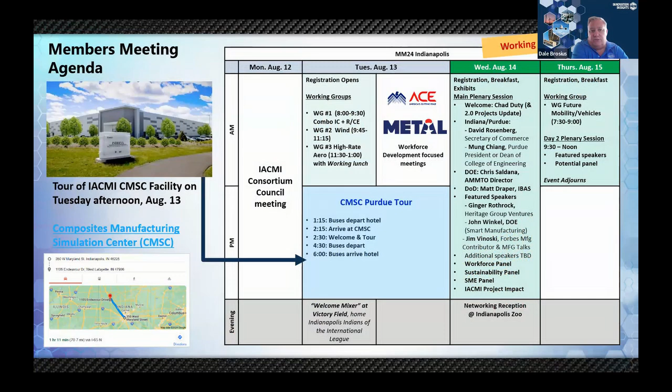It will be here in Indianapolis, where I'm located, and where the U.S. Olympic swimming trials are right now located. Busy days. Main slate happens Tuesday, Wednesday, Thursday. I'll go into a little more detail, but Wednesday, Thursday are the main speakers. Tuesday is working groups, workforce development meetings, and a tour of Purdue, plus a special event.

We'll have the working group meetings all through the morning until 1 p.m. on Tuesday, with one more working group in the Future Mobility and Vehicles Technology early Thursday morning.

The afternoon of Tuesday, we'll load up on buses and go up to Purdue, about a little over an hour away from the meeting site, and see the Composites Manufacturing Simulation Center at Purdue, along with the 3D Experience Dassault Systems Center there. So lots to see in terms of manufacturing equipment, modeling, simulation, and other great innovations.

We'll come back from Purdue, and there will be a welcome mixer at Victory Field, where the Indianapolis Indians play. It's about a block or so away from the hotel. We've got tickets for that for those attending the members meeting, as well as beverages and refreshments on the Corona patio. So you'll have both seats as well as food and drink.

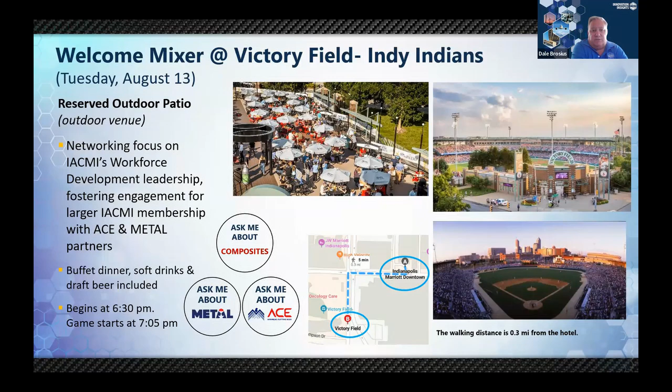On Wednesday night, after the main slate is over, the long day of Wednesday when we have lots of presentations and participation, there's a great networking reception at the Indianapolis Zoo, great pavilion there, plus the opportunity to see some critters. So we look forward to those of you joining us there.

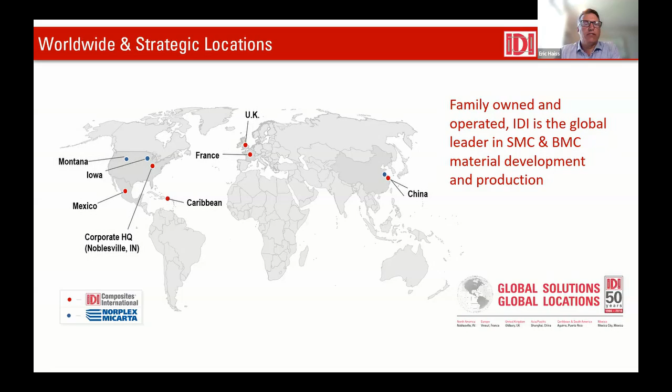I just want to take a couple moments and introduce everyone to IDI Composites. If you're not familiar with us, IDI is a thermoset composite manufacturer. We're privately owned and headquartered in Noblesville, Indiana, where Dale is sitting at today. But we are a global company, so we have locations in Europe, in Asia, and in North America, as well as a sister division, Norplex Micarta, which also operates in the thermoset industry, but in a slightly different set of products. Our core markets—we started in the electrical industry.

IDI—dielectrics is what the D stands for there. So we started in the electrical industry, but we have now diversified into a broad spectrum of different markets, including infrastructure, transportation, and construction. We're pretty well diversified across all four of these, which has been very helpful as we've gone through the last few years in tumultuous times with supply chain, COVID, et cetera. But also as we see different trends, for example electrification happening in the automotive industry, our electrical background has been really beneficial for us to respond to those requests from our customer base.

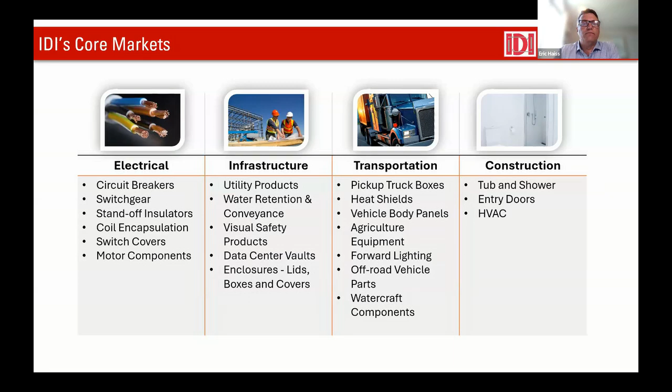Some of you may know, and some of you may actually have visited this facility. So we are currently moving into a brand new facility, just a few miles east of our current facility. Our current facility is in the downtown area of Noblesville, and there were some infrastructure projects the city had planned that essentially forced us to move into a new facility. So we have custom built a 120,000 square foot facility dedicated to SMC and BMC production.

It will roughly double our current capacity of SMC production, and will include 2 new SMC lines, 60-inch width. We will be upgrading one of our existing lines and putting it back into production for a total of 3 production lines. We'll also have a couple of development lines available for new products and co-working with customers.

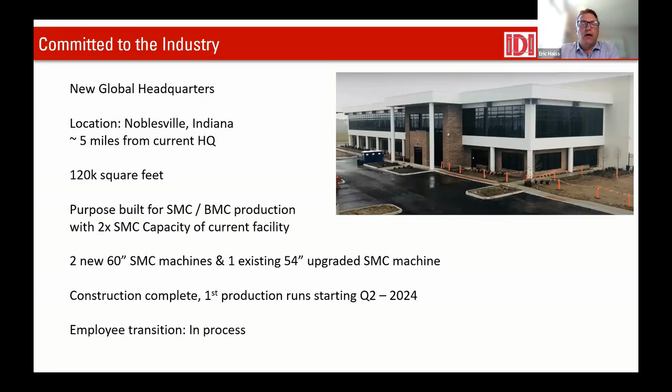So construction is complete. We're actually running early lots of material from the facility now, and our employees are moving from one facility to the new facility currently as well. So really exciting times for us, and just an indication of the commitment that IDI and the Merrill family has to the composites industry.

So we want to start off with this: customers for a long time have known SMC for the performance it provides, its ability to design complex parts, the thermal capability of SMC, toughness of SMC. So there are a lot of features customers like, but in the wake of recent sustainability developments, it's been facing a headwind because of the thermoset nature.

But it's important for us to recognize that SMC has 2 other features that may surprise you. First is that SMC does have a low carbon footprint compared to other materials. And also SMC already has recycled content in most cases, and the product itself can be recycled. So there's good information on both fronts, but today our intent is to talk about the low carbon footprint and how it compares to other materials.

In '22, IDI started to get inquiries from a variety of different OEMs in automotive as well as in the electrical side of our business regarding carbon footprint and sustainability in general. So we started to look at our knowledge base internally and recognized that although we had some history with recycling SMC and BMC products previously, we really didn't have expertise around sustainability, and we needed some outside help. So we launched a multi-phase global project with Forward Engineering, with Adam Halsband here in the Detroit area, as well as his team in Munich, Germany, to better understand sustainability and how that would impact our products, as well as global warming potential of other products.

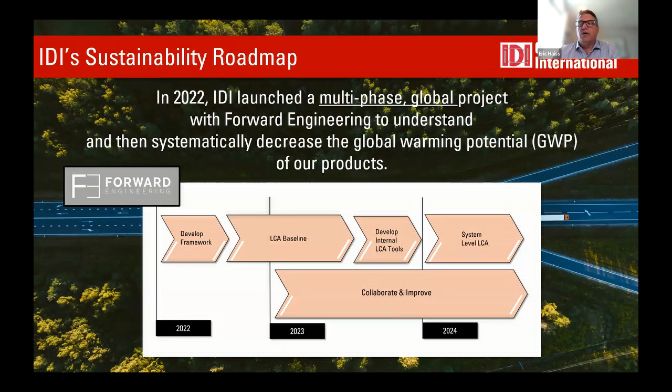So after some introduction and training Forward Engineering did for our team, which was really valuable, they recommended that we do a top-down cradle-to-gate life cycle assessment. So what does that mean? Essentially, we looked at the carbon footprint, or global warming potential, of our SMC materials, as well as BMC materials, but focused initially on SMC, looking at the energy consumed within the facility, as well as all the raw ingredients, et cetera. And we came up with a cradle-to-gate global warming potential for our SMC products.

So cradle-to-gate means that this is the carbon footprint for a kilogram of SMC that is packaged and ready to ship at our dock—so that is the gate, if you will. The cradle means that we include all of the embodied carbon for all of the raw materials that come in, whether it's the fiberglass, the resin, the packaging, the fillers—right from whether it's the mine or the initial oil production needed to make those raw materials.

All of that carbon is included, including the transportation to move it throughout the supply chain into our facility, as well as all of the energy, waste, et cetera, that our facility uses and or generates to create that kilogram of material. So this is an important point.

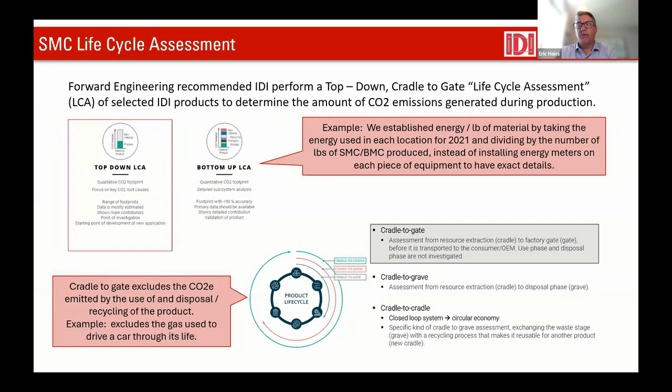You guys still hear me? Dale, can you guys hear me? Yeah, sounds good, Eric, thanks. Kim, can you hear me? Yes, yes, okay, you sound great. Sorry, yeah, I just lost power, but luckily I have a backup power supply, so that's why I got darker. Sorry about that. It's all good. Okay, as long as you guys can hear me, then we'll keep going.

So we have 2.5 kilograms of CO2e, which is equivalent. Not all emissions are carbon dioxide, but we do have a method of basically translating them into carbon dioxide, and so that's what we mean by equivalent.

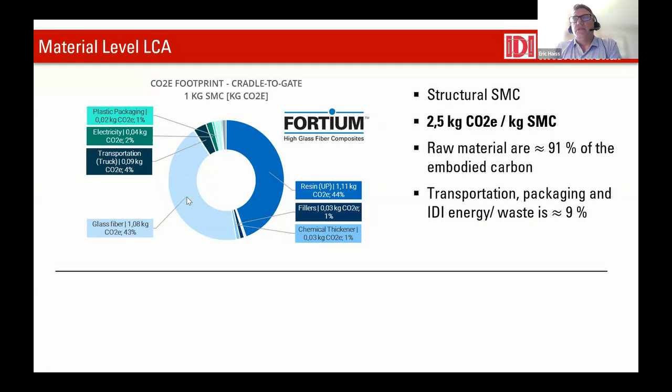So CO2e. What's important here, when you look at this pie chart, it breaks down the sources of that CO2 equivalent global warming potential, and most of that is coming from resin and glass. Very little of it actually comes from the electricity that we use in our facility or the plastic packaging, most of which is recycled as well. So this is an important thing for us to understand as we looked at that and started to plan what our next steps were for improving our products.

We've since done bottom-up LCAs for about almost 30 of our products now, including different BMCs, SMCs, carbon fiber filled products, glass fiber filled products, et cetera. So we have a wide variety of different global warming potential data that allows us to understand how we make those improvements to products going forward.

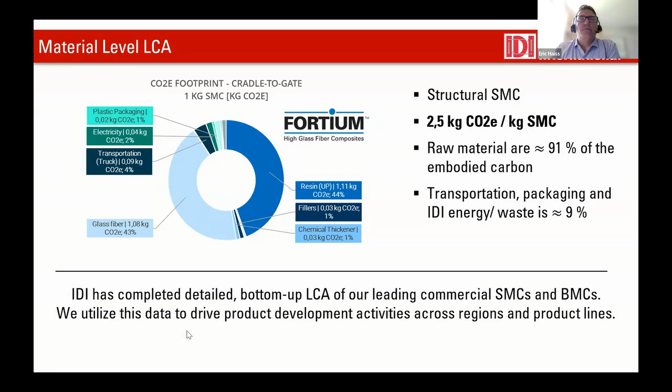Now, the next question you might ask is, well, how does the global warming potential of SMC compare to other materials? Here you have a comparison of some materials that we are often competing against for different applications.

Steel is a little bit lower on a kilogram basis than SMC. Aluminum is quite a bit higher. And then we have thermoplastics - this is a polypropylene product where we've got both an LFT pellet as well as an organosheet. So depending on the product, we compare pretty similar to the thermoplastics.

But this really does not provide the full picture for decision makers. So it's easy data to understand and digest, but what's a little bit more tricky is to understand what happens further on down the supply chain and the product process.

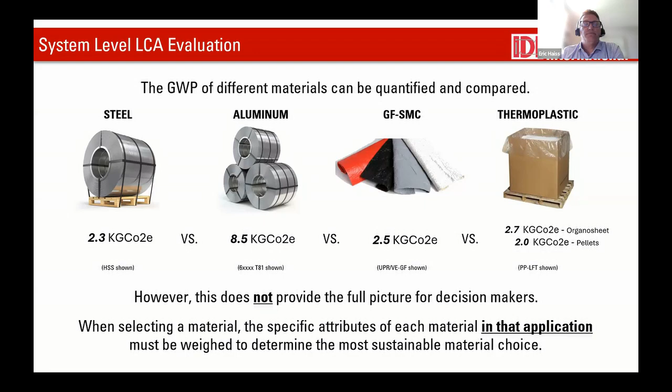So to do that, we have to move from a material level LCA, which we just looked at, to what we call a system level LCA. For a truck bed, for example, this application has a lot of demanding requirements. It's one of the favorite applications for SMC - it works very well in this application, and you can see why here.

That application requires toughness, strength, abrasion resistance, UV stability, and SMC is very well suited for that. But it can be made in other materials as well - steel, aluminum, even thermoplastic could potentially be done, although other than the carbon fiber application that's currently in production, there's not one that is already there.

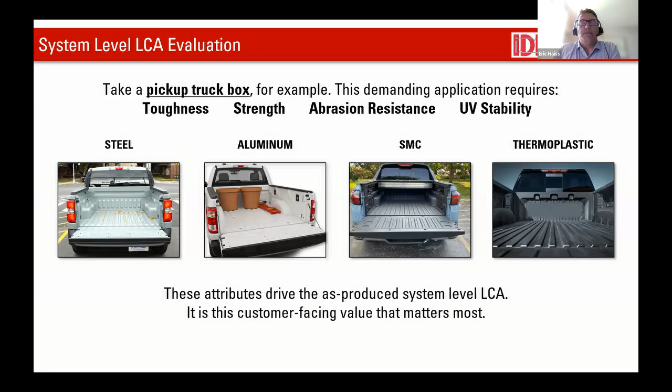So this is what we're trying to understand, is how do these materials compete against each other in an application like that. One of the things that we do is, each material has different densities, also different mechanical performance, and it's important that we consider all of that when we design a complex application like a truck bed. One of the ways we do that is through FEA.

So we, along with Forward Engineering, worked on 4 completely different designs that were focused on each of those materials. We took advantage of the strengths and also tried to design around some of the weaknesses of each of those materials to come up with an efficient production-representative truck bed, so that we could compare the carbon footprint of each of those. To make sure that we were in the right thicknesses and right designs, we used FEA analysis to do that.

Here's an example of one of the tests that we did in FEA, which is a 30 kilogram block that was dropped from a 0.66 meter height, so that we could compare how the impact of that block happened with those beds.

In order to come up with this list of criteria that we used for the design phase of these boxes, Forward Engineering and IDI went to several different large OEMs with a list of criteria that we thought were relevant and asked for their input. So we feel very comfortable that we have a good understanding of the key design elements of a production intent truck bed.

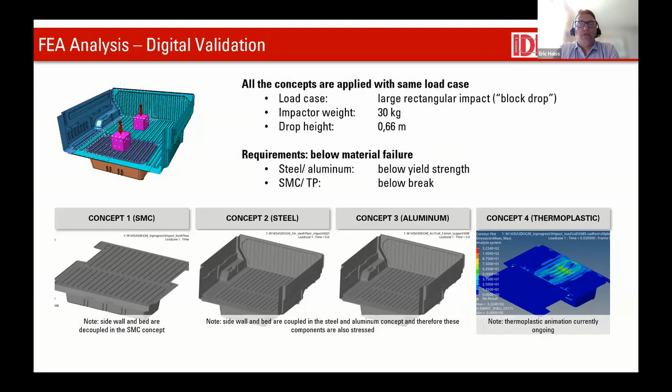So here you can see actually four different designs. The leftmost is SMC. You also have steel, aluminum, and then the thermoplastic design.

Some of the differences you might look at: all of these beds have trunk wells in them. We found that most consumers prefer to have some kind of a bed well there. They like that feature as a cooler or for storage of products, etc. However, in the metals, it's not as easy to integrate that type of feature.

So we looked at ways to minimize the impact on a metallic application or implementation, and you may see that we reduced the size of the opening slightly. Also, you may note that the actual well is made of SMC in both of these cases, because we found that SMC was a more efficient way of making that well than if we had stayed with steel or aluminum in those designs.

You may also see that the panel breakup is different, so the different shades of colors indicate the different panels that were done in the design. For example, here you can see the steel sidewall is all one piece because steel can be drawn relatively deeply without needing additional steps.

Aluminum, on the other hand, struggles with depth of draw, so you have to create the wheel well from a separate piece. You'll see these types of features as well as different wall thicknesses on this page.

Once we had those designs, the next step was for us to go through and create a very detailed bill of material as well as bill of process for each one of those designs.

So these are just some screenshots of some of that, where we're looking right down to the cross members, the fasteners, the seam sealers, the E-coat, spray-on bed liners in the case for the metal applications. We create that list of materials that are needed, as well as the different processes, whether it's stamping or painting, et cetera, that are involved.

Once we had those lists of materials and processes, we went and looked up the appropriate life cycle information for each of those products - it's called a life cycle inventory. We have a full list of not only what those values are, but where we got those values from. We use third-party verified data in every instance, so that we have the latest information in a very comprehensive, detailed study.

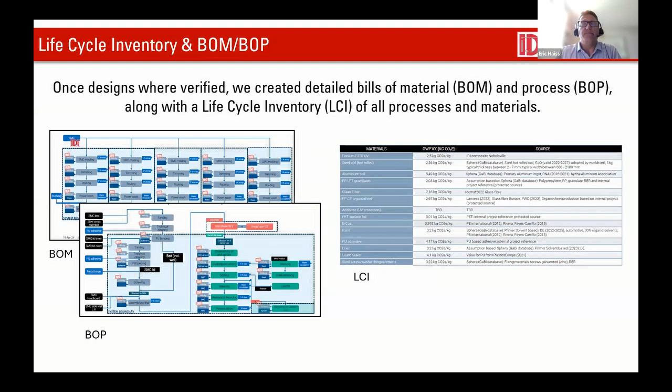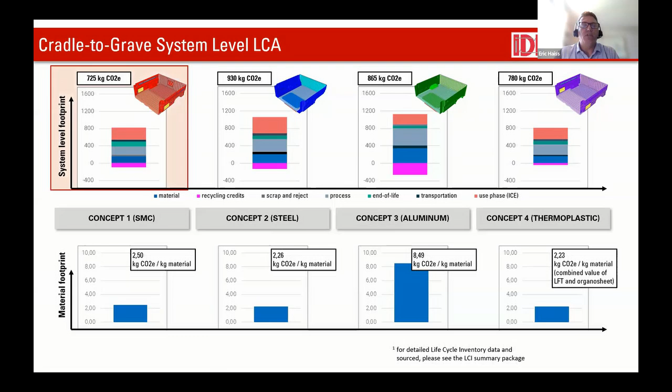Today I also wanted to add some new information. One of the questions we got asked often is how does the transition from internal combustion engines to electric vehicles affect this study?

Here's some results of a sensitivity analysis that Forward Engineering did. We look at the same life cycle, 200,000 kilometers, but using an electric vehicle instead, assuming the standard US grid electrical carbon footprint. This would vary region to region - for example in Europe which might have a lower carbon footprint, or an area like TVA, Tennessee Valley Authority, that has a lot of hydropower. But looking at the average electrical grid in the US, the overall numbers do come down when you look at the carbon footprint, but the ratios more or less stay the same between electric vehicle versus internal combustion engine.

Going to one more slide here, just to talk about next steps. I mentioned briefly that we are meeting with OEMs, setting up those meetings now, and intend to do that in the next month and a half or so to get their direct feedback for the detailed information. Then we plan to publish a peer review paper later this year. We have to get the word out.

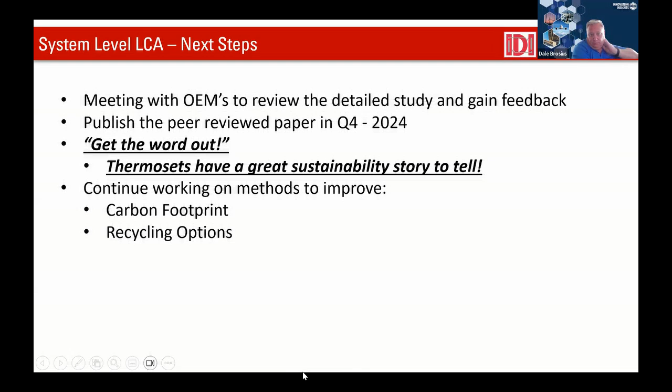Sorry, Dale, I can't hear you. Kim, am I coming through? I can hear you just fine, Dale. Eric, can you hear me? All right, he can't hear me either. I will send him a message in the chat, and we can make sure those questions get to him that way. Maybe his power came back on and he's muted. I'm working on that. Let's try it again - Dale, can you hear me now? Yeah, we can hear you. Can you hear us?

I think we're going to have to move into doing his questions online - I can hear you guys now. Okay, great, sorry about that, guys, maybe your power came back on, whatever happened. So the question was, where do you plan to publish your peer-reviewed paper? Great question - I honestly don't know that answer at this point. I'm working with Forward Engineering on the process to do that. We intend to present at the SAE World Congress in front of a wide variety of material groups there, so that we're very open about the study.

You're probably still not seeing it, right? You need to share the window. It's not showing right now? You need to share the other application, the web browser, or share your screen directly. I thought if I just put it over there, it would pop up. Now you're seeing it? Yeah, okay. Thank you, Brian.

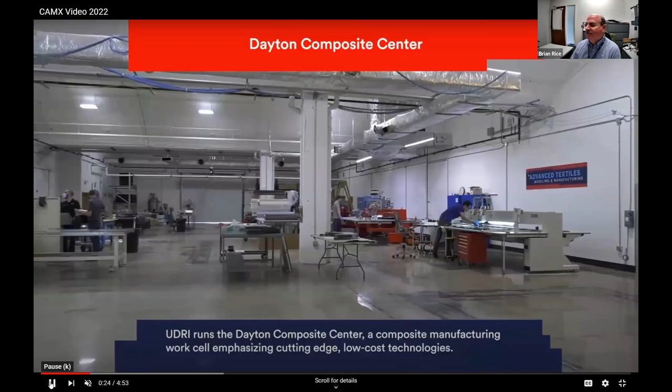Most of our work historically has been with the Air Force for aerospace. For those of you at the IACMI members meeting in January 2020, UDRI hosted the meeting and we gave tours of our lab. Some of you on the call may have seen this lab before. It's gone through extensive renovations and additions since 2020, so I'll try to highlight that, and I'll go into more detail on these technologies in my PowerPoint presentation.

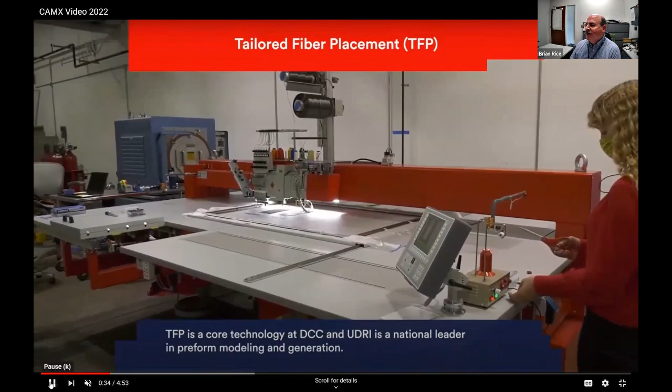What you're seeing here is called tailored fiber placement. We had a number of projects with IACMI on this, which I'll discuss in the PowerPoint presentation. A big focus of ours is topology optimization, putting fiber in the load path, and then using automation to do that.

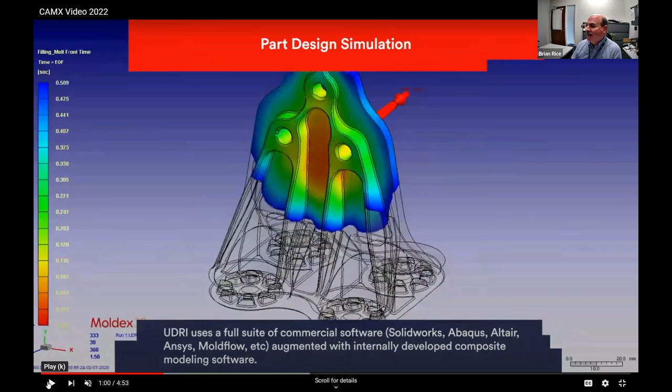We did a lot of work with rapid clave using rapid cure epoxies. This project here is one we did with Airbus, where we used TFP to make preforms, then blended those with thermoplastics, put it in an injection mold, and essentially did overmolding to make clips and brackets. We also did all the simulation, for both processing and stress analysis.

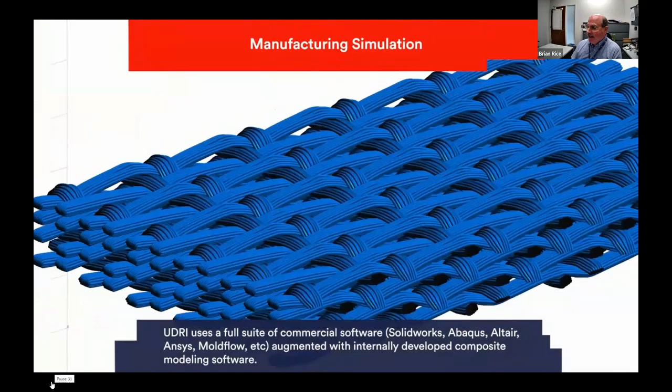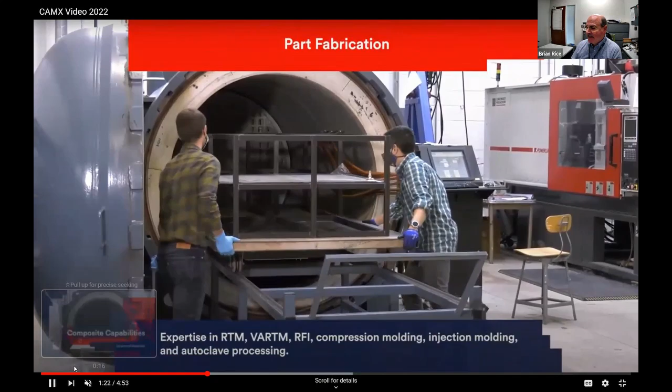We do quite a lot of work analyzing different fiber architectures when you're putting them in an RTM mold, autoclave, or what have you, to simulate what that exact fiber architecture is going to be. This is our autoclave, 5 feet by 10 feet.

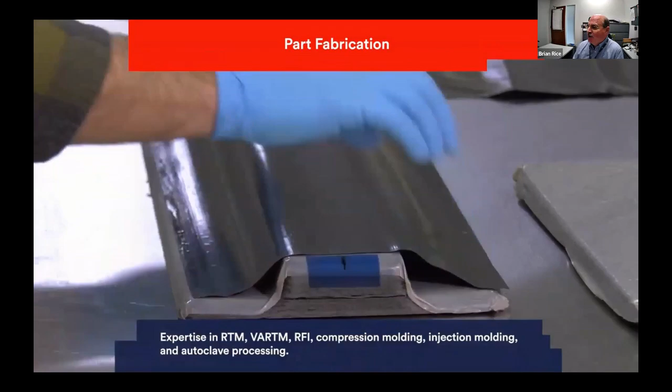It can do thermoplastic, so it goes up to 800 degrees Fahrenheit. Some of what they're showing you here is doing some of the rapid cure aerospace epoxies and utilizing some low-cost AM tooling.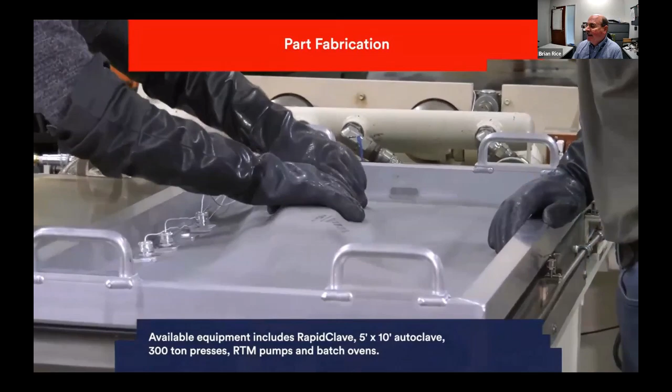This slide here is our current RapidClave. I'll show a video in a minute on the new RapidClave that is coming to UDRI later this fall.

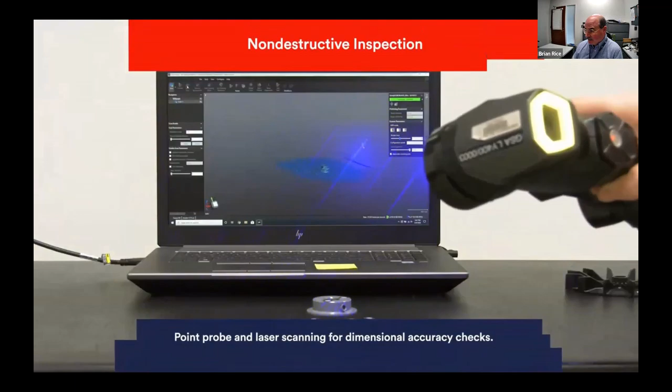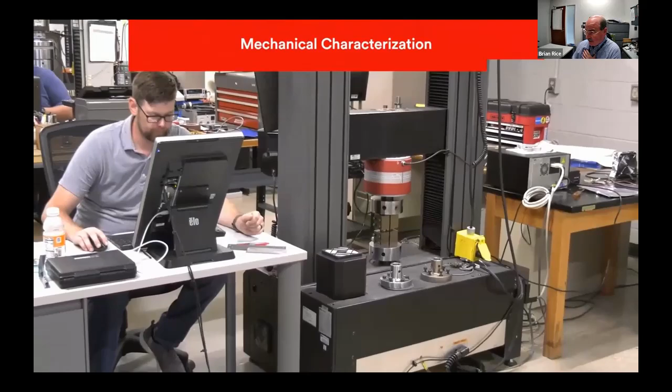Reverse engineering with a laser scanner, a Creaform scanner, so we can take existing parts and develop CAD files with them. Here's a micro CT scan, so you can look at defects in fiber architecture of cured composites, and then of course mechanical testing, both through environmental cycles, hot, wet, and that type of thing.

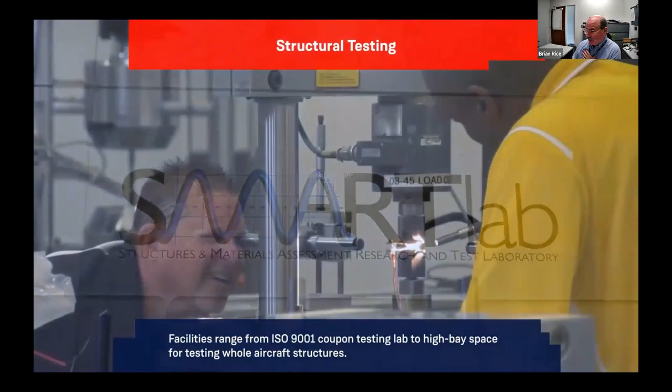Here's our large scale SMARTlab. So we do large structures. There's about 30 load frames in there, and we can do high strain rate as well.

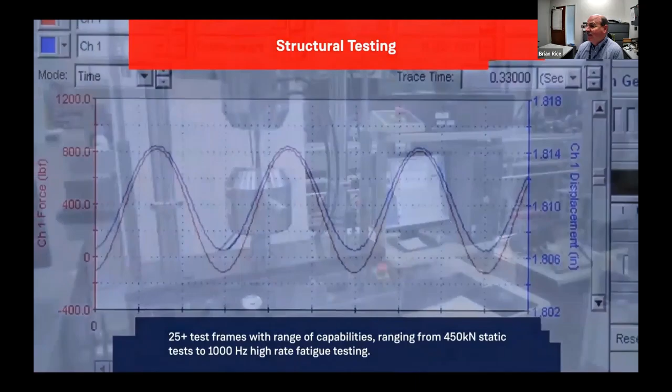We had an IACMI project for automotive, getting high strain rate behavior, collision behavior of materials, if you will. And we have DIC technology. It's big enough you can even test an aircraft wing in it. On this large structure, we're also doing large aircraft landing gear for life extension.

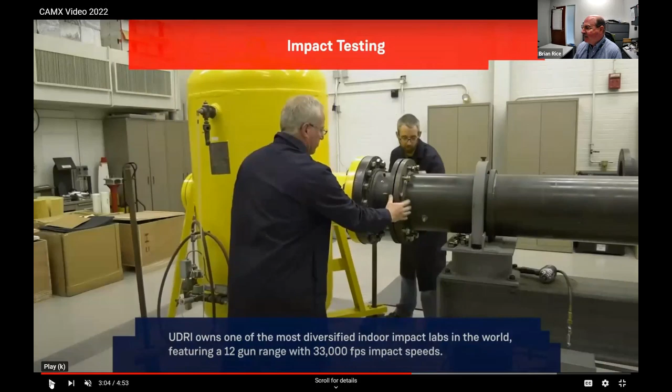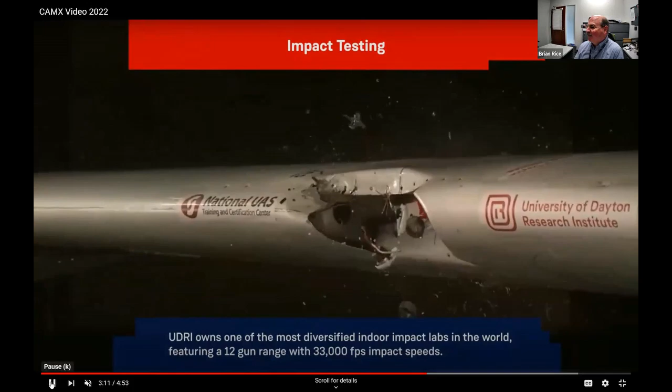When you visit UD, a lot of people like to see the impact physics lab. We have the fastest gun in the world, used for things like NASA simulating micrometeoroid impacts, as well as launching birds at canopies and that type of thing. These are different guns, but there's also testing what happens if a UAV gets too close to an airplane. That's why at airports we try to keep UAVs away from aircraft.

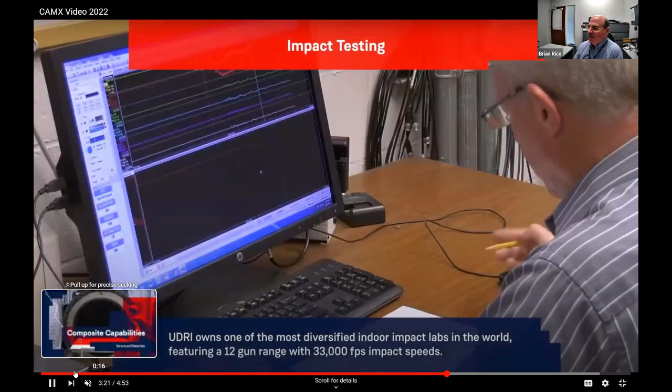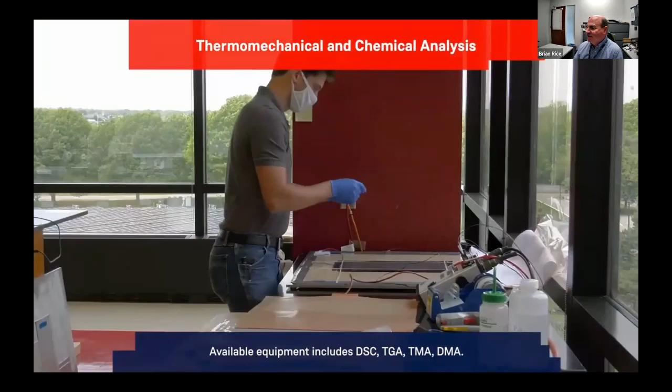This is a high-speed video of a simulated bird strike on an aircraft canopy. So we do a lot of high strain rate, unique testing. This is our thermal analysis laboratory, with all the TMAs, DSCs, TGAs, etc., to characterize the materials.

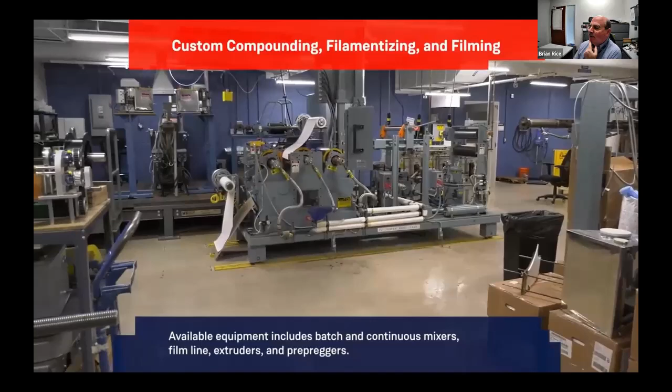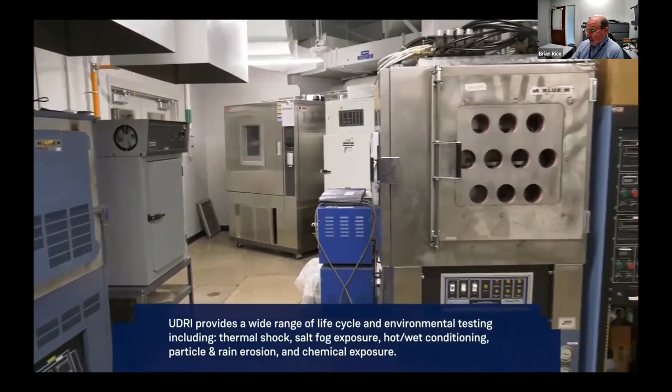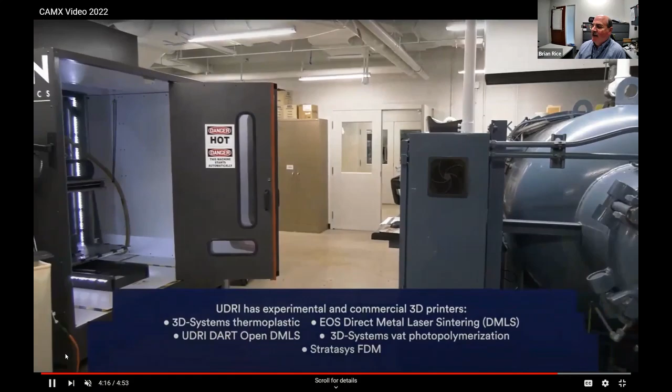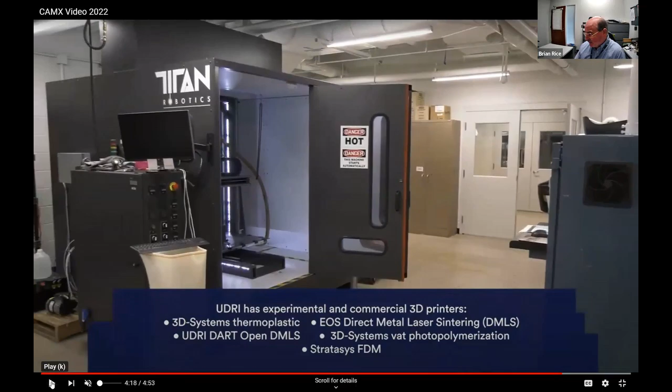These are all the ovens and humidity cabinets and so forth that we use for conditioning composites for different use cases. Right here is our pellets-to-part Titan system. We've done quite a lot of work with carbon nanotube filled multifunctional thermoplastics for various applications, as well as printing tooling that might be used in the autoclave or rapid clave, for example.

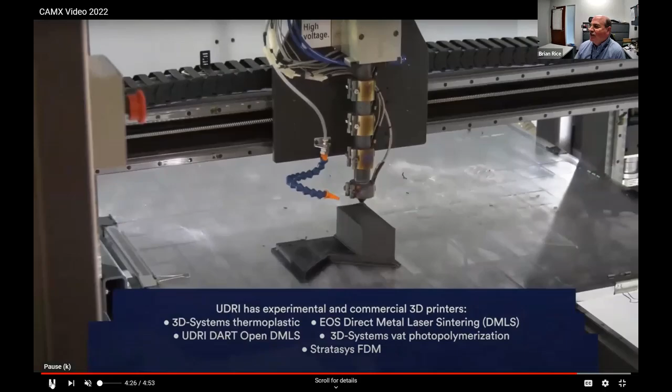I think a lot of people now are familiar with that. But one thing unique that UDRI does is we make custom materials. I'll spend a little bit of time on this.

This was also the subject of several projects with IACMI, where we grow vertically aligned carbon nanotubes. This robot was part of an automation project we did to demonstrate that we could produce at least 10,000 square meters of the VACNT sheets that would go interleaved in between composites on an annual basis. Now that's being ramped up by an order of magnitude in the next couple of years, and then 2 orders of magnitude over the next 5 years as applications develop. Anyway, so that's the growth furnace.

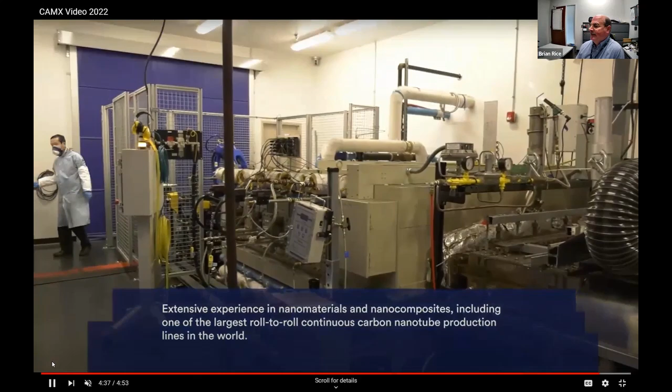I think that's it for that. So I guess I gotta close that out. All right, I'm gonna pull up another video here.

This will be of the rapid clave. So I guess I gotta reshare. Okay, is that Dale? Yes. You've seen the rapid clave? Okay, good. Yes. All right, perfect.

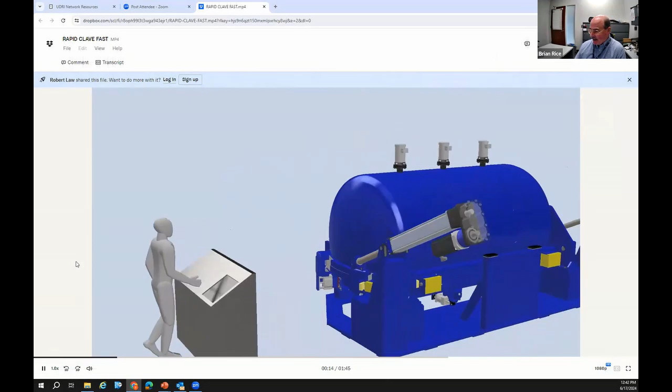We had quite a lot of activity with IACMI previously with Globe Machine to take the rapid clave that was developed for the automotive world, such as the Corvette body panels, and reinvent it, redesign it for aerospace. So you saw that UDRI has a 5 foot by 10 foot autoclave, and what we have here now is a reimagined rapid clave that's also roughly 5 feet by 10 feet, so that way we can have a direct comparison. This vessel has been built and pressure tested. Now it's going through all the add-ons, all the electronics and all that type of thing. It should land in Dayton in November.

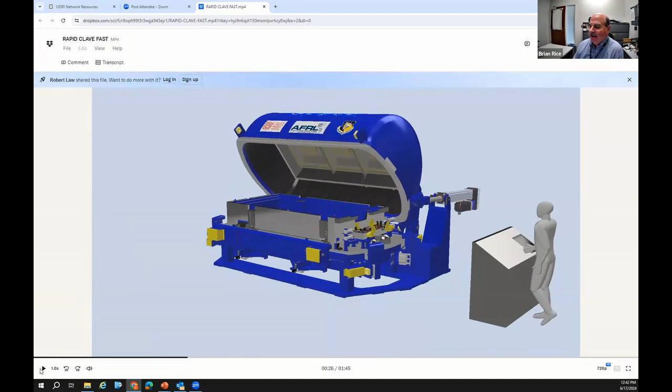What's unique about the rapid clave versus, say, an autoclave? An autoclave typically, you've got a heater in the back, a fan that's blowing hot air, so it's purely convective heating. With the rapid clave technology, you can have a heated fluid, like a heated oil, that can heat the tooling directly, which is usually why you have slow ramp rates in an autoclave. The heated air will be projected downward rather than from the back like you have with an autoclave.

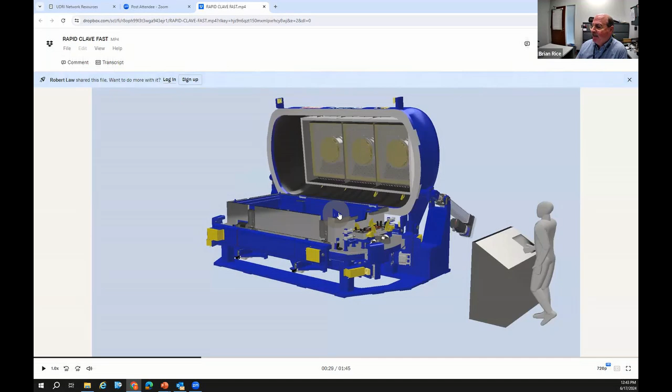So you'll get more uniform heating with the hot air as well, and you'd have the possibility, if you wanted, of resistive heated tooling or even IR type heating. You're basically exploiting the three major means of heat transfer, so we can get heating rates that are consistently over 100 F per minute. That way we can achieve rapid cure cycles.

As you can see, it's split down the side to make it easier to automate the part placement and extraction from the rapid clave. On the base, on the right-hand side where my cursor is, all the process utilities get plugged in automatically, including thermocouple ports, vacuum ports, etc. So it's really designed to operate much more quickly and efficiently and more in an automated mode than, say, an autoclave would be today.

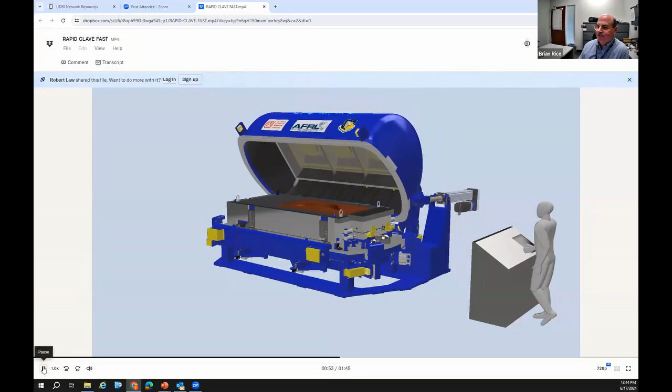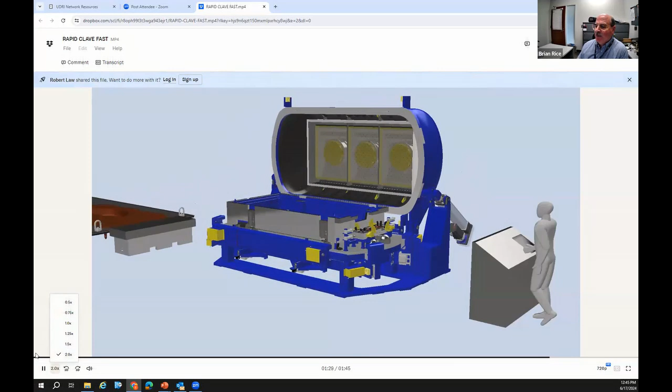Let me speed up there a little bit. You can see how the clamping mechanism operates for the pressure vessel and how the door opens and closes and the tool gets placed in and extracted. Presently we're working with at least 4 major prepreg manufacturers that have high rate cure prepregs, primarily for aerospace, and running those in the current rapid clave and making demo parts and so forth.

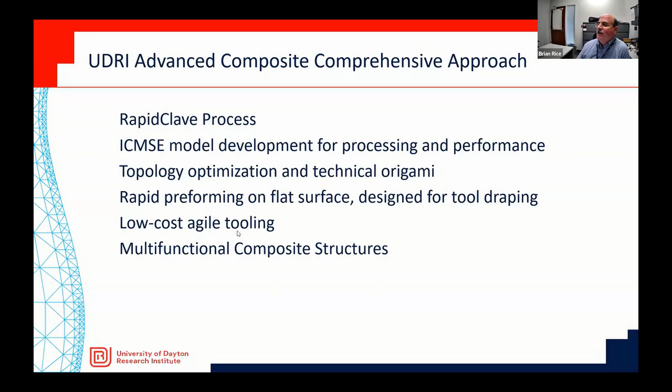So let me share back to my PowerPoint slide. I'll go a little bit deeper on some of the things I just showed you. So again, here's the rapid clave.

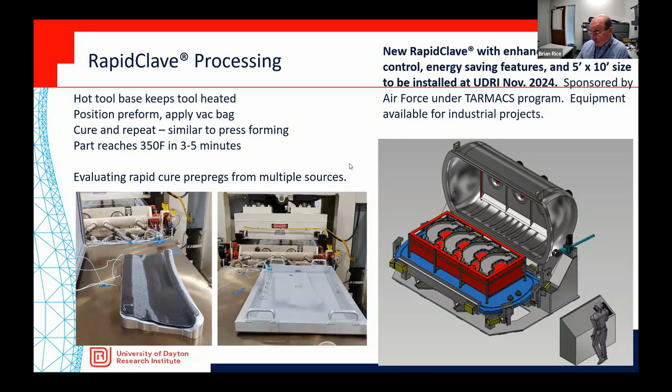We have what we call rapid clave number 1, which we're using to process different prepreg materials and different tooling concepts today. Generally, you're looking at roughly a 30-minute cycle time based on the kinetics requirements of the materials that are out there for aerospace. Here you can see an idea of how you'd get four aerospace parts packed into the rapid clave in the future, and I'll elaborate a little bit further on these representative parts that you see here. But anyway, it'll be installed around November. Definitely interested in anybody that's interested in IACMI projects in the future, taking advantage of that technology.

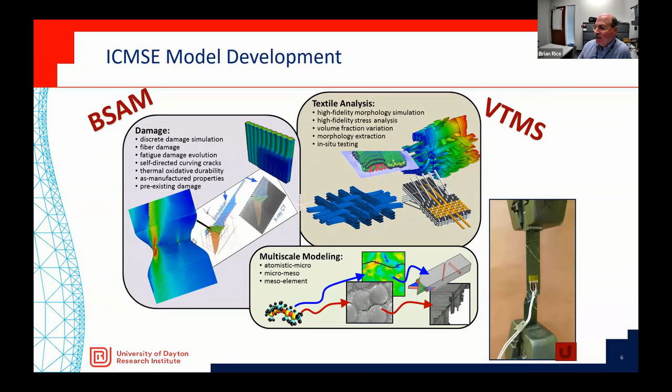A little bit about some of our design, because again, at UDRI we do the material science, we do design, manufacturing, testing, pretty much a full spectrum of services. BSAM is our high fidelity FEA model, so you can take into account the exact fiber architecture, layer by layer, and if you have inclusions or whatever, model all that. It's what we'd call a local FEA model, because you get a very high fidelity damage progression based on the actual state of the material.

We tie that in also with what we call topology optimization. So if you have your FEA model and you know where the stresses are, and you have a technology like tailored fiber placement that can actually locate a tow exactly where you need it, how would you take advantage of this? Here's an example: if you had a sandwich structure, two skins with a honeycomb in the middle, which is very lightweight and stiff, but not very damage tolerant.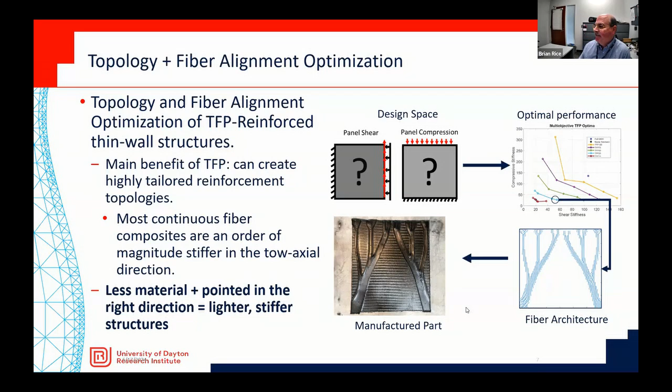And then we can use the tailored fiber placement to actually render that design into the structure. Tailored fiber placement remains, here in the US, not heavily used, but in Europe it's actually been around for over a decade in production parts, such as the Airbus 350 window frames.

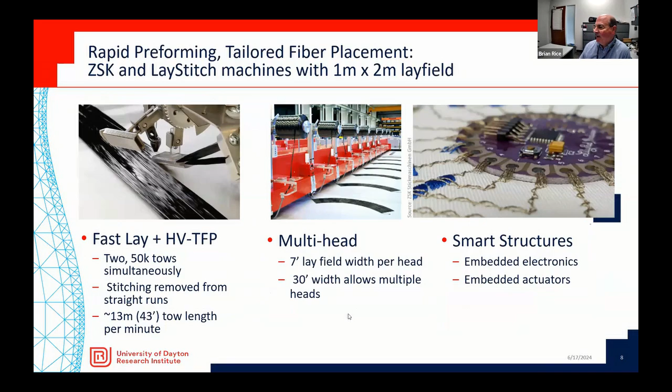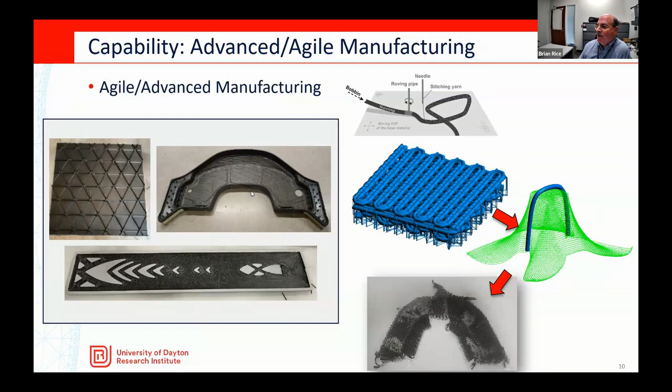We've done quite a variety of different structures using tailored fiber placement and topology optimization. I'm going to focus on this one here - it's a wing bulkhead for a UAV.

We had the load requirements and stiffness requirements. Our baseline was A&P QISO braid. We wanted to see if we put in tailored fiber placement stitched on top of the QISO braid, what kind of weight savings could we achieve. It was pretty impressive.

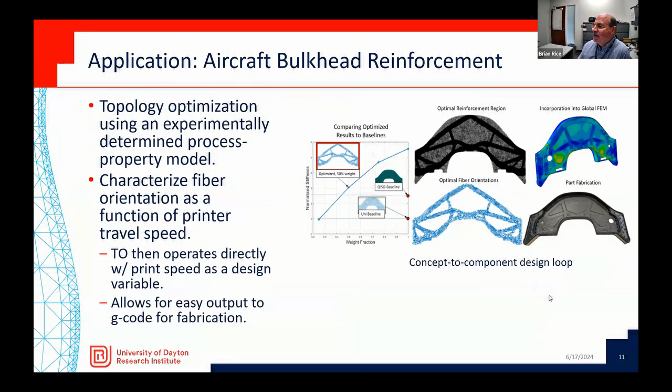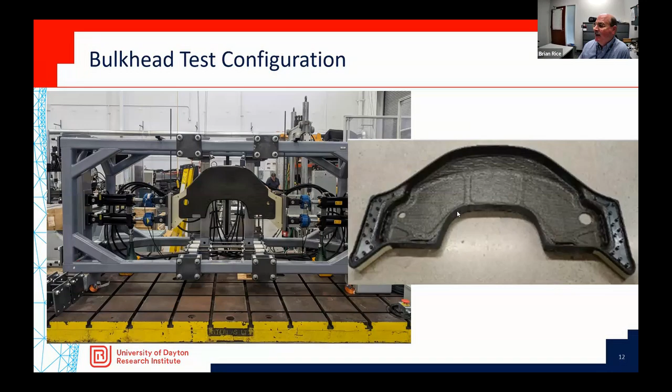And we made several of these bulkheads, and then we designed a load frame here that it'll be tested in a couple weeks. As part of the testing, we're going to have the DIC and strain gauges that will help us map what our FEA predictions were to the actual performance of the composite structure, because this is a very highly anisotropic structure with all the unidirectional fibers built in with the QISO braid.

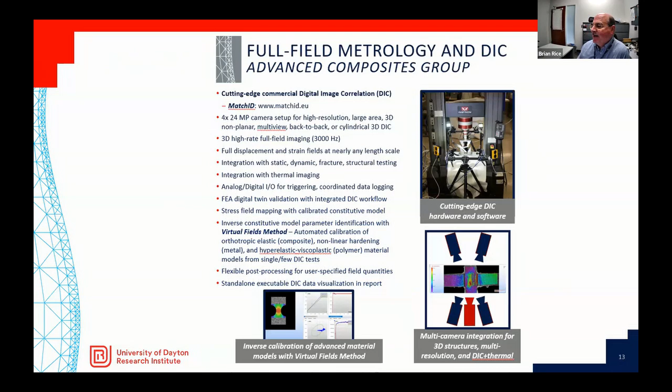And this is just - we've got the latest state-of-the-art digital image correlation setup there that'll be helping us essentially get the full field of strain as we're doing the test.

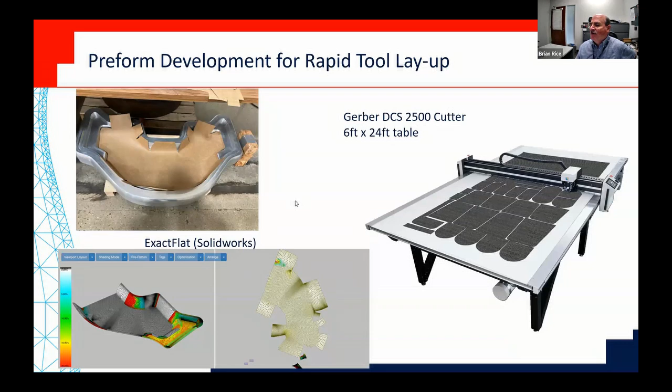In terms of trying to optimize automation and reduce time for ply layup, these kinds of parts are typically machined from aluminum because, frankly, the labor to do hand layup with pre-preg is very time consuming. It makes the parts very expensive. So we're showing using the latest software for ply flattening and Gerber cutter, designing the layup not just for the mechanical properties but also ease of layup, which allows us to make something like this affordable using composites versus typically what would be an aluminum structure.

Now shifting gears a little bit from continuous fiber composites, we acquired from Krauss-Maffei something called long fiber injection, which is essentially a wet spray up, robotic wet spray up of chopped - what used to be, presently is - glass fiber with a urethane resin. For example, John Deere tractors utilize a lot of these parts, or this process, to make parts where you can actually do in-mold coatings and that type of thing.

Our project with the Air Force, Krauss-Maffei, and Lockheed is to say, okay, we want a robotic process that's very rapid, essentially zero scrap, but we need more aerospace properties. We want carbon fiber, we want a high Tg urethane, we want 50% fiber volume, no porosity, for the strength and stiffness. So that's what we're doing on this program now - spraying up carbon fiber with the urethane, and we're going through a different evaluation of candidate carbon fiber tows, and looking at different spray up patterns and so on.

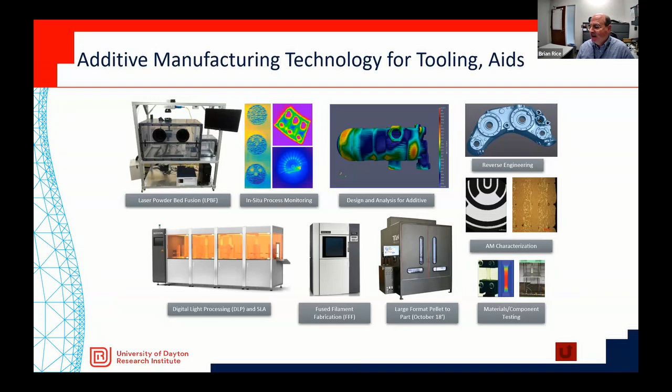Additive manufacturing - we've done a lot of work, both metal and polymeric, whether for end-use articles or in this kind of area. We've done quite a lot for tooling, like carbon fiber filled Ultem tooling for autoclave and rapid clave, etc. Also a lot of tooling just for checking out tailored fiber placement preforms - how the preform is going to lay out or nest into the tool, to validate that.

Also, in the area of low-cost tooling, we're working with the Air Force. There's a company, Machina Labs, that does what's called incremental sheet forming. They can take a piece of sheet metal, clamp it around the perimeter, and then form that sheet metal into a tool or an end-use part. The beauty of this is you're not machining away a lot of material - you're just forming the material.

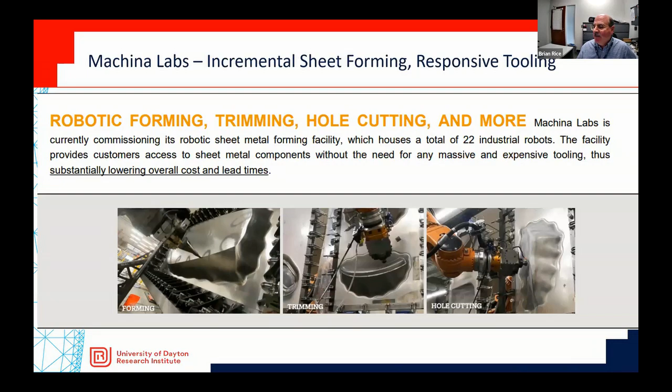So if you make 20 tools and do really high rate production, it's going to be much cheaper than something like CNC machine tooling. And the tooling is very thermally responsive because steel or aluminum in a rapid clave environment is very lightweight, so it can heat or cool very quickly.

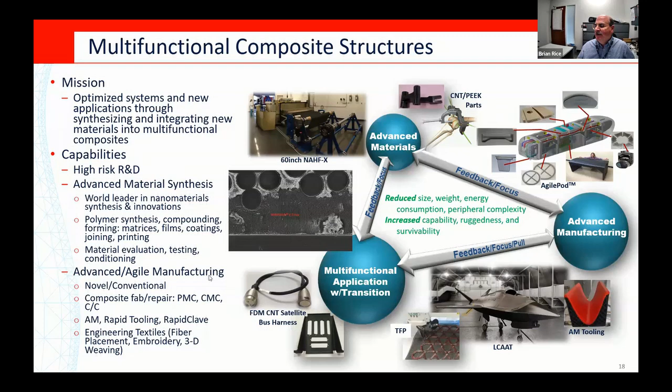Wrapping up here, we've done a lot of work over the years, 20 plus years, with multifunctional composites or nano enhanced composites. We've done a lot of work with IACMI on the VACNTs - that's what you'll see here. We have a project starting with IACMI to make hydrogen storage tanks where you're interleaving carbon nanotubes between layers of prepreg to enhance the properties, the fatigue life, and minimize microcracking, that type of thing.

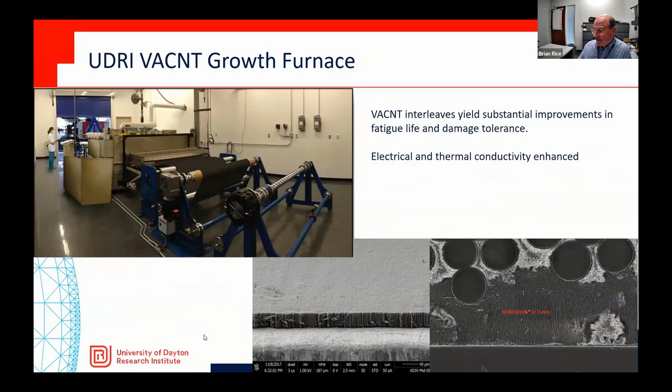And that is it, so I'll stop sharing.

All right, thanks Brian. Very comprehensive presentation, and sometimes it's good to go back and see the full breadth of capabilities that UDRI has. I know you've left some things out because I've certainly seen other things as well. But everything from materials development to materials testing to full scale testing and evaluation, it's always quite impressive.

There's a question that's come in: does rapid clave produce, or has the rapid clave produced higher thermal stresses? I think it's probably related to the quick heating and quick cooling. Does that result in higher thermal stresses than, say, an autoclave, which would be much slower in heating and cooling?

Right, so a couple points on that. We've taken several materials, some that were developed for rapid cure, like in a press, and some that have historically been used for autoclave. Number one, we did a material property database and saw comparable properties, but also in terms of any kind of part warpage - again, we have our laser scanner - we haven't seen any dimensional differences comparing autoclave to rapid clave that might be resulting from part warpage or that type of thing.